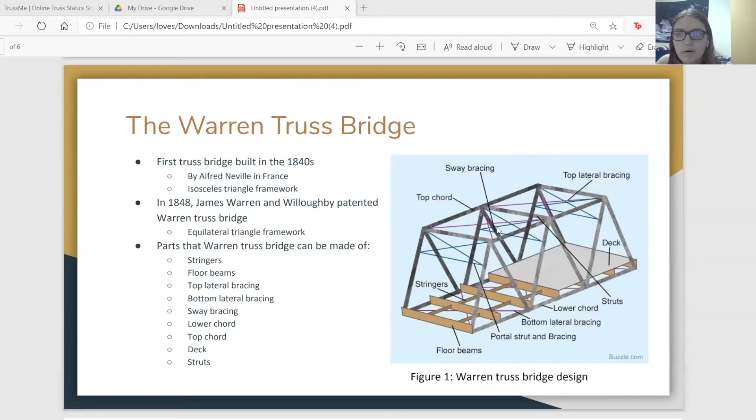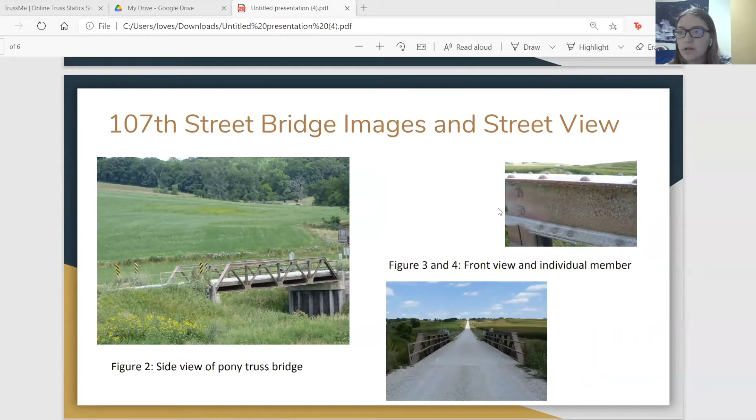All right, now let's talk about our truss example, the 107th Street Bridge. The Warren Pony Truss Bridge over Coon Creek on 107th Street in Iowa is a very old truss bridge residing in the beautiful green countryside of Iowa County, as can be seen in these images here.

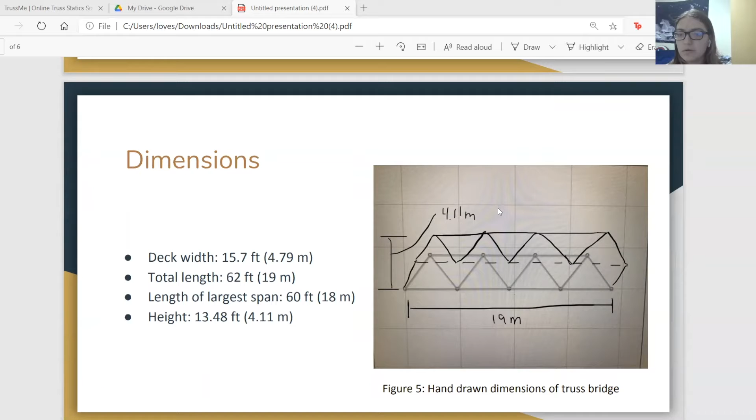All right, the dimensions vary with deck width of 15.7 feet, a total length of 62 feet, and the length of the span at 60 feet. Additionally, the height was found to be 13.48 feet or 4.11 meters, which we will later use in our calculations.

All right, now some historical facts. So according to Bridge Hunter, this Warren Pony Truss Bridge was built in 1920 by an iron and steel manufacturer, Jones and Laughlin Steel Company of Pittsburgh, Pennsylvania. Later, in 1962, the bridge was rehabilitated and is still open to traffic today.

Although the bridge is old and rusting, according to historicbridges.org, its national and local scale for historic significance ranks at a 5 out of 10 due to the beauty, heritage, and craftsmanship endowed by it.

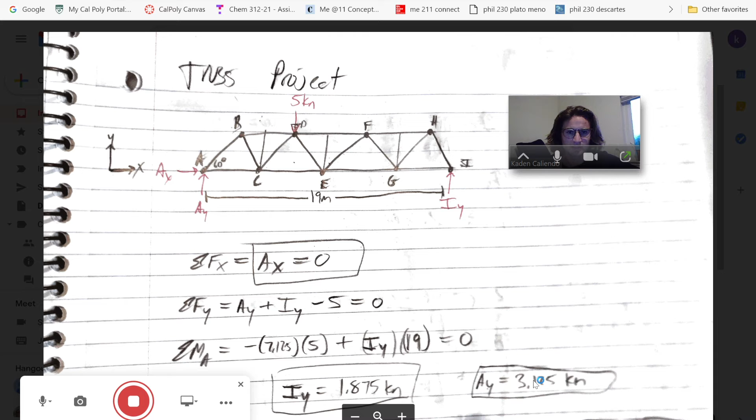All three of these reaction forces are going to be the same regardless of which method is used to solve for the internal forces in the members of this bridge. Method of sections and method of joints will all use these three reaction forces to sum the forces in all the members.

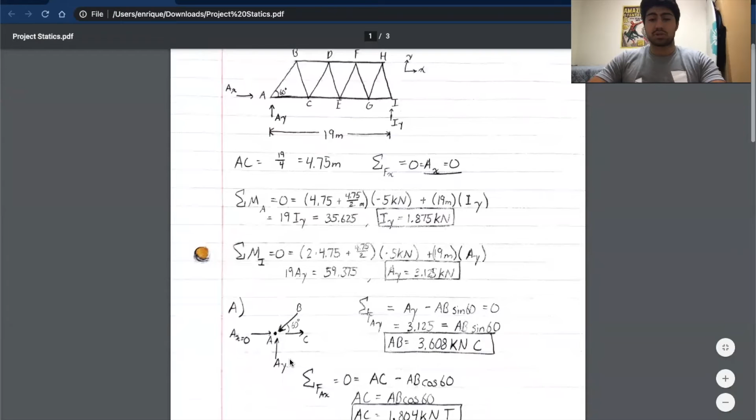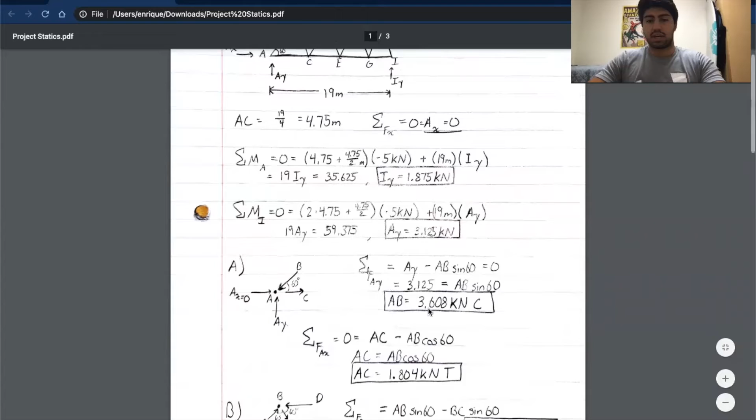So first you should start with the sum of forces in the Y, because there's only one unknown, because we have the reaction force. If you did the sum in the X direction, you'd have two unknowns. You'd have the unknown AB and AC. So doing Y first works out because we already know Ay. So all we need to find is AB. And after finding that, then you can do the sum of forces in the X direction, because now you know AB, all you don't know is AC. So it's just a simple one equation, one unknown.

At first, we assumed it was in compression, and we were correct because the answer was positive. If it had been negative, then we would know it was going the other way. And it's in compression because the reaction force of it is pushing towards the joint, meaning the force inside the two force member would be pushing away from the joint, meaning it's in compression. And then the opposite is true for AC. Because AC is pointing away from the joint, then inside the two force member, it's pointing towards the joints, meaning it's in tension.

And so point B is the same thing. You draw a free body diagram, you assume directions. You already know AB is in compression, so you assume the same for point B. It has to be the same. And then you start again with the Y, because you already know AB, but you don't know BC. So you calculate BC, and then you do sum of forces in the X direction, because now there's only one unknown. So you calculate that. It's all simple one equation, one unknown. And you go through doing the same thing for every joint.

Joint C, joint D. Joint D is a little more complicated because there's 5. You start with sum of forces in the Y. You know the 5 kilonewtons is coming down, and you already calculated the force in CD up in joint C, right here, CD. So then all you'd find in that would be DE, and then sum of forces in the X direction. You already calculated BD when you did joint B, and you already know CD and ED. So all you'd have left would be force DF, and the same would be said for E and F and G. And then once you hit H, you only need one joint left to calculate. You've already calculated the rest.

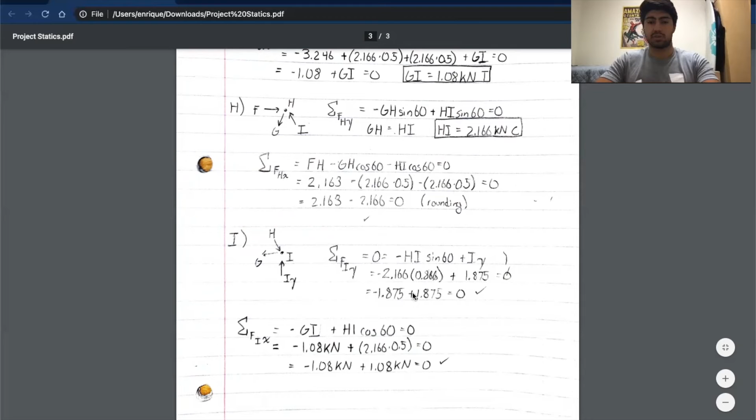But just to check, make sure the answers are correct, we can sum the forces in the Y, and we should get 0 with all of our numbers we already know, and exactly 0. So that works out. And same for the sum of forces in the X direction. They're all 0. So it works out.

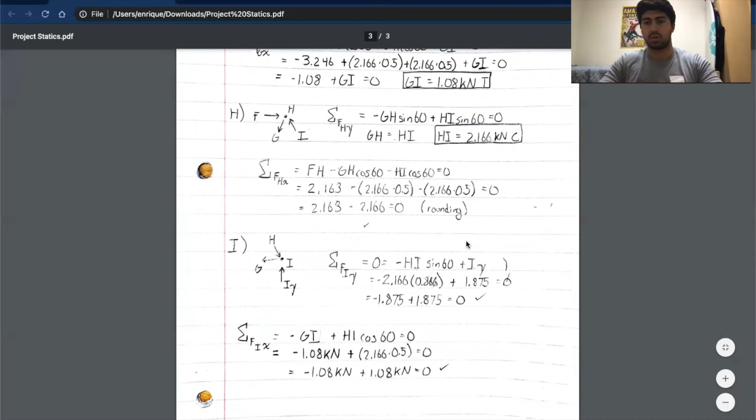That's all you do for method of joints. You go joint by joint, showing all the forces, assuming forces. If you get negative answers, then you flip it and you know it's in the other direction. And if it's pointing towards the joint, then the beam is in compression. If it's pointing away from the joint, the beam is in tension. And that's it.

Thank you. Welcome to this sections part of this video. As you can see, we have a small diagram of the bridge set up, and then there are numbered cuts that we're going to make through the bridge because we are going to do method of sections. It should be noted that any of these cuts can be performed in any order. That doesn't really matter. All that matters is that you do the whole bridge as a free body beforehand so that you can work out the external forces. And Caden went over how to do that.

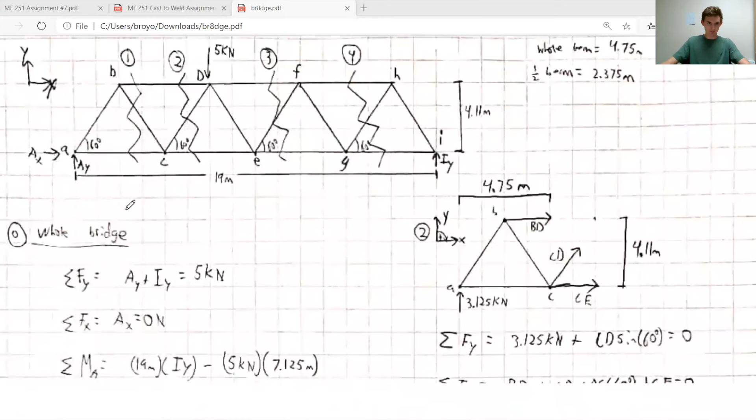So as we go down, we're going to start with this first cut because that's how I labeled it. You make your cuts, and for each beam that you cut through, you replace the beam with a vector. And I assumed that all of these were in tension. That way I know that if I get a negative number, it's in compression. It makes everything very simple. As you can tell, the beams that we don't cut through, we just leave as lines because we're not looking at the internal forces in that beam. And since it's a two force member, they cancel out.

So looking at all of this, you get 3 equations, force in Y, force in X, and then you do a moment equation. I recommend doing the moment equation on the joint that has 2 unknowns. That way you'll actually be able to solve it. And from the force in Y, you can immediately solve for BC. It's a positive, so it's in tension. Force in X, you can't immediately solve. So you go to the moment about B, which immediately allows you to solve for AC. Go back to the X direction, gets you BD, and you've discovered the forces in those three beams.

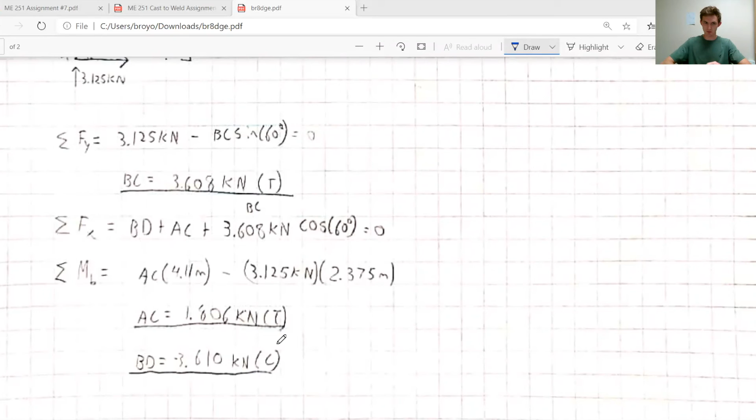If you want to check yourself, you can do it on a different cut, cutting through the same beam and then some different ones. And here we have that member BD again, and we did get the same number. So it's a good way to check yourself on a test. Here is the free body for the second part and the answers for the second part, if you want to pause it.

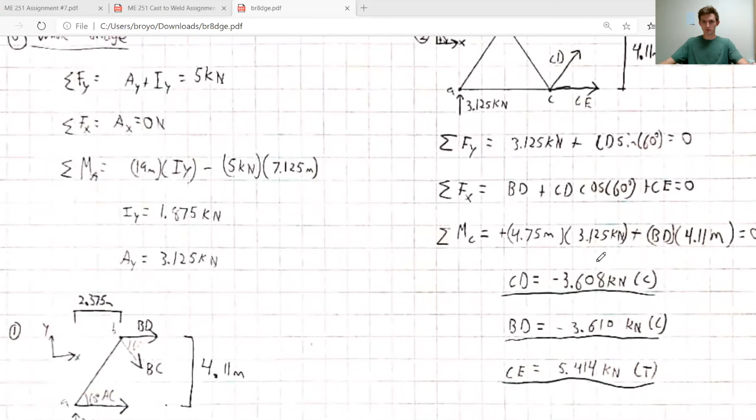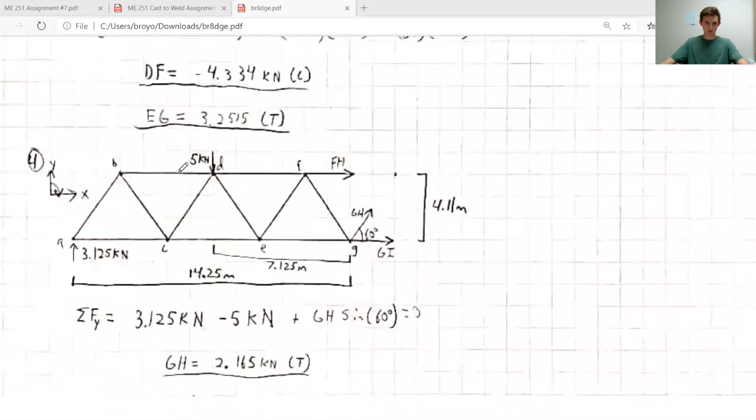And then here is the free body for the third part and the equations for the third part. And the free body for the fourth part and the equations for the fourth part. Hope this helps out. And the T's and C's are for tension and compression.

Hi, let's briefly recap our answers that we calculated for our members. So as you can see, this is the method of joints, and basically I'm just going to scroll through and show all the answers once more and then compare it to the answers that we calculated on this truss analysis software.

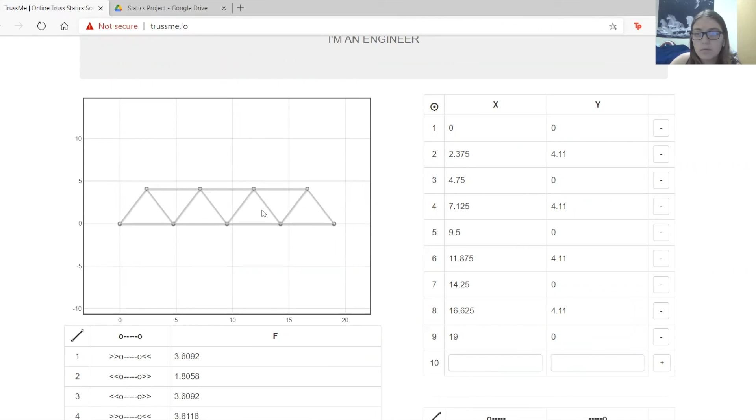All right, so as you can see, the members go from AB all the way to HI here, and then when we put in our dimensions and calculate and make our Warren Truss Bridge through this software and hit submit, then we get these answers for our members,

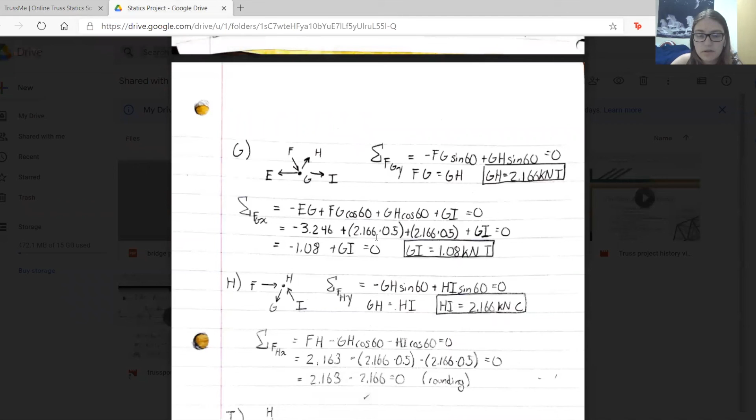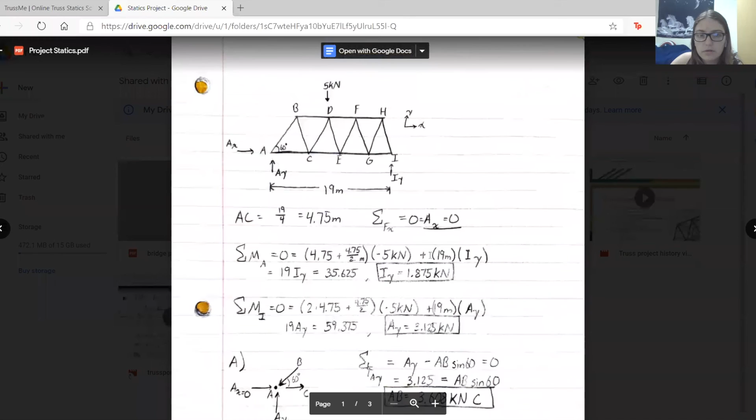which if you compare them to whatever they match up with, like for instance, AB would be from 1 to 2 because of the points, so then this member is going to be member 1, and then you can find that our answers do in fact match. And that is a good sign because that means that we are correct when we calculated this.